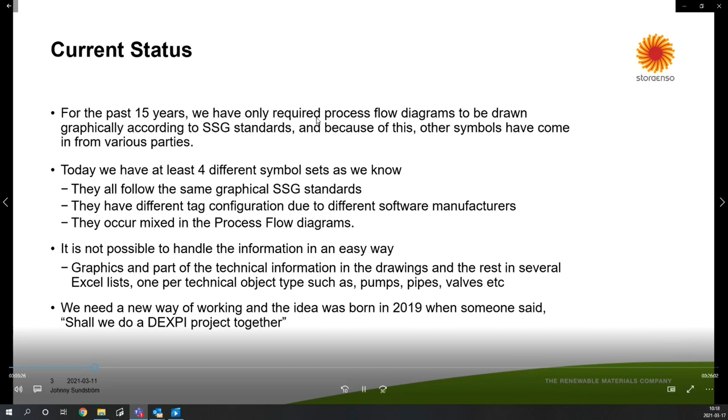Current status. For the past 15 years, we have only required process flow diagrams to be drawn graphically according to SSG standards. And because of that, other symbols have come in from various parties. We have at least 4 different symbol sets today, as we know. They all follow the same graphical SSG standards. They have different tag configurations due to different software manufacturers. And they occur mixed in the existing process flow diagrams. It's not possible to handle the information in an easy way. We have graphics and part of the technical information in the drawing, and the rest in several lists.

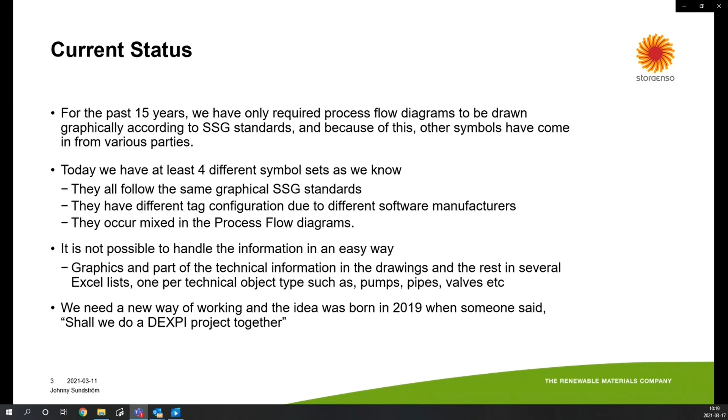Yes, we need a new way of working, and the idea was born in 2019 when someone said, "Shall we do a DEXPI project together?" At Stora Enso, we started thinking about what we need to learn so we can understand what we should do. We understood that most of the software manufacturers in plant engineering already work with established standards and open concepts. We need to learn which standards affect us in the work. We need to learn how DEXPI works.

We need to learn which SSG standards need to be harmonized to be useful. We need to learn how information exchange works. We need to learn what increased interoperability means, because it's a very important step towards digitization of process plants. And last but not least, how should we handle existing flowchart diagrams that contain valuable information?

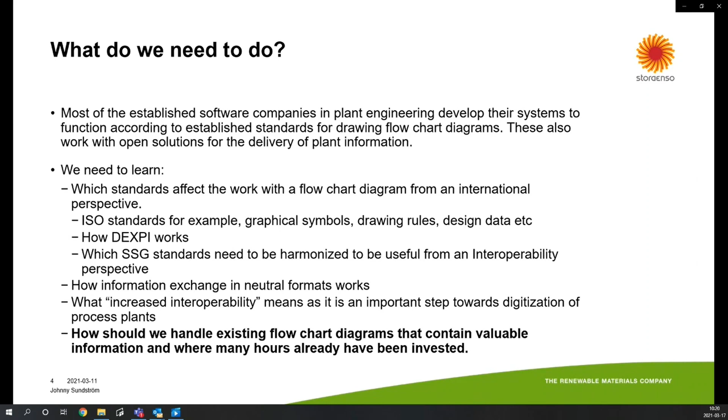Now to the pilot ID and the scenarios. We decided to choose an ongoing project with a suitable scope. We had a breakdown on the partition wall in the existing tank, and the solution was to build another tank including necessary equipment.

And as I mentioned before, the process flow diagrams were designed with EDOC process application for AutoCAD and symbols according to SSG standards. And now we wanted a flowchart diagram based on established standards and concepts, which should be easier to handle by all parties involved in the project.

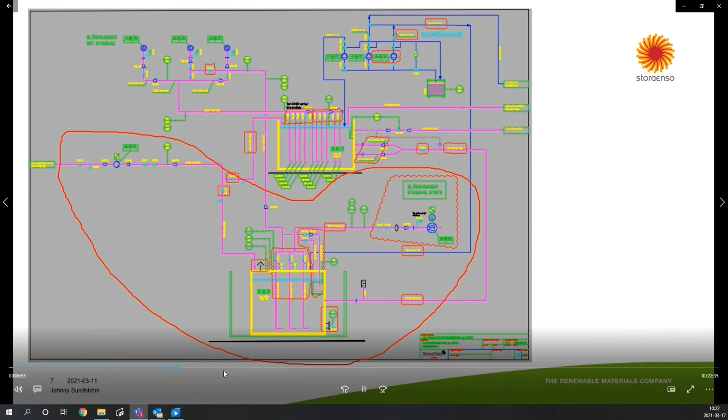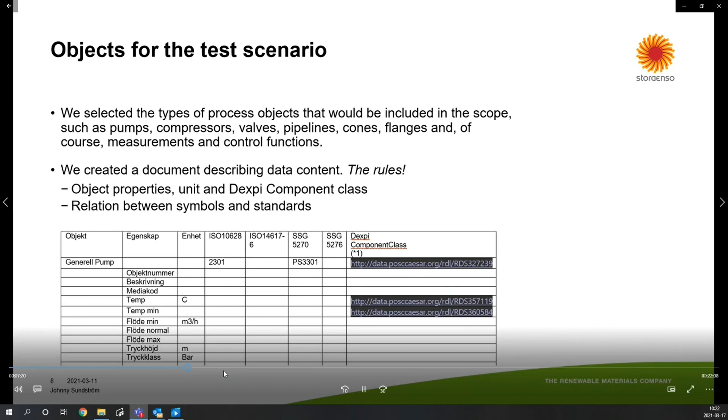We selected the process objects for the tests. We also created a document describing data content, the rules, object properties, units, and DEXPI component classes. And we also included the relation between symbols and standards. We also created 3 test scenarios.

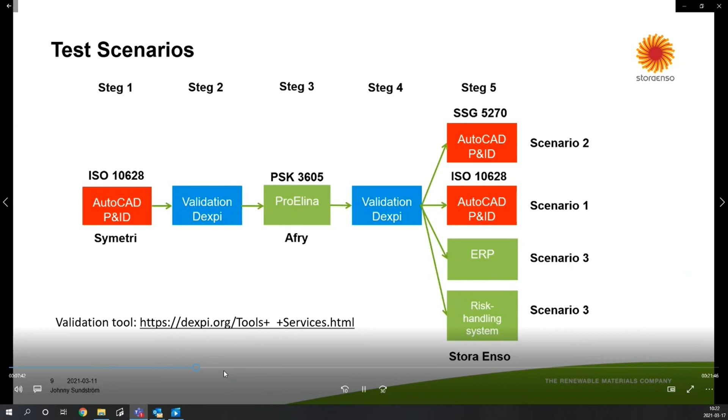And we also realized that the technology makes it possible to draw with one standard and recreate the drawing with another standard if the standards are harmonized.

Hello everyone, my name is Janne Ujärvi and I'm working as an application engineer at Symetri. I will in this section go through a little bit how we interpreted and converted customer requirements according to the DEXPI specification.

As we already heard in the previous section done by Johnny Sundström, we started this pilot work by finding out what customer requirements the plant owner has for the P&ID delivery. In this pilot project, Stora Enso Fors is the plant owner and will be referred to as the customer. In this case, the customer wants to use SSG symbols on the P&IDs.

To be able to swap symbols during the import-export, we investigated the difference between ISO symbols and SSG symbols. In the next step, we started out to match customer data requirements against the DEXPI data model and attributes. We start by taking a quick look at the symbol graphics. We found out pretty quick that the SSG symbols are based on the ISO symbols for the most part, even if the paper and forest industry have lots of unique symbols in addition.

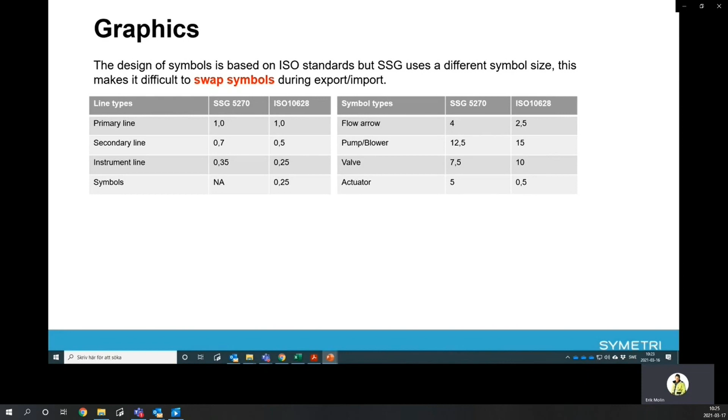The DEXPI specification includes lots of DEXPI data attributes. Some of these DEXPI attributes are easy to match according to the customer requirements. But a lot of the required data attributes need to be handled or transferred as custom attributes. To set up and define custom attributes is a pretty easy task. The challenge is to add them to the right hierarchical level, especially when you have different types of P&ID systems trying to work together.

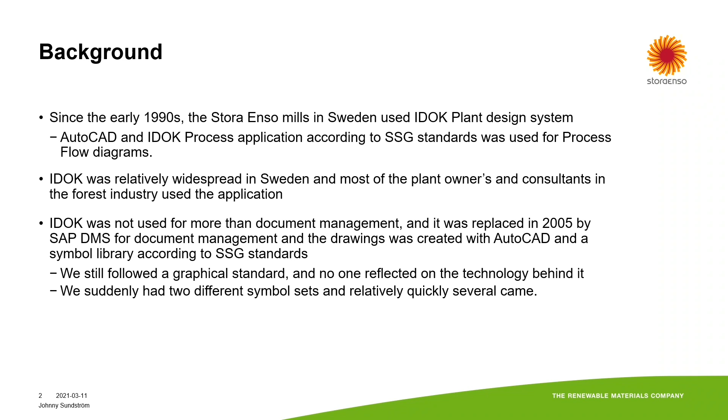What does that mean? We still followed a graphical standard, but no one reflected on the technology behind it. We suddenly had two different symbol sets, and several came quickly, I will say. Current status: for the past 15 years, we have only required process flow diagrams to be drawn graphically according to SSG standards, and because of that, other symbols have come in from various parties. We have at least 4 different symbol sets today, as we know.

They all follow the same graphical SSG standards, but they have different tag configurations due to different software manufacturers, and they occur mixed in the existing process flow diagrams. It's not possible to handle the information in an easy way. We have graphics and part of the technical information in the drawing, and the rest in several lists.

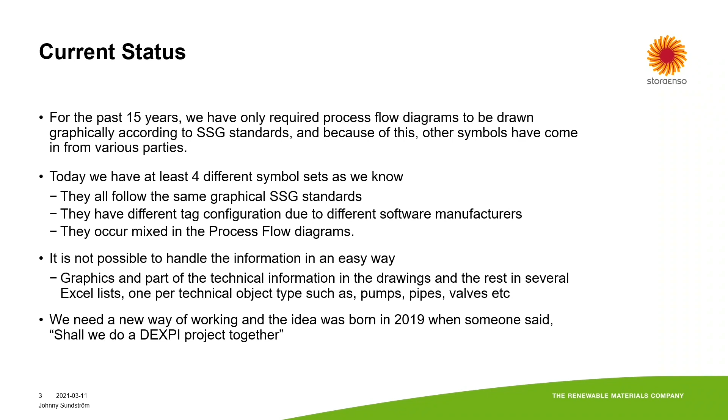Yes, we need a new way of working, and the idea was born in 2019 when someone said, 'Shall we do a DEXPI project together?' At Stora Enso we started thinking about what we need to learn so we can understand what we should do.

We understood that most of the software manufacturers in plant engineering already work with established standards and open concepts. We need to learn which standards affect us in the work. We need to learn how DEXPI works. We need to learn which SSG standards need to be harmonized to be useful. We need to learn how information exchange works. And we need to learn what increased interoperability means.

Because it's a very important step towards digitization of process plants. And last but not least, how should we handle existing flowchart diagrams that contain valuable information?

Now to the pilot ID and the scenarios. We decided to choose an ongoing project with a suitable scope. We had a breakdown on the partition wall in the existing tank, and the solution was to build another tank including necessary equipment.

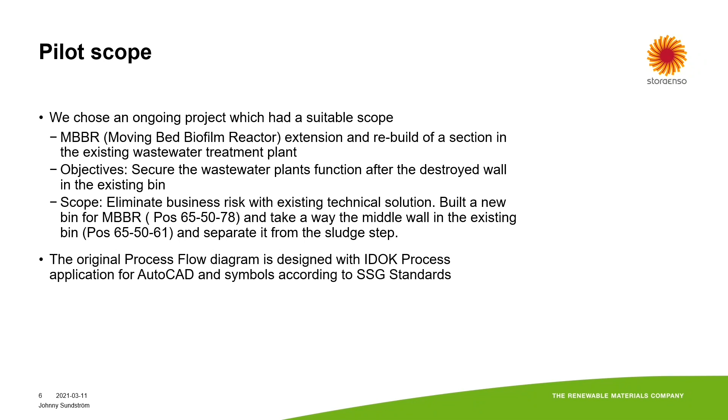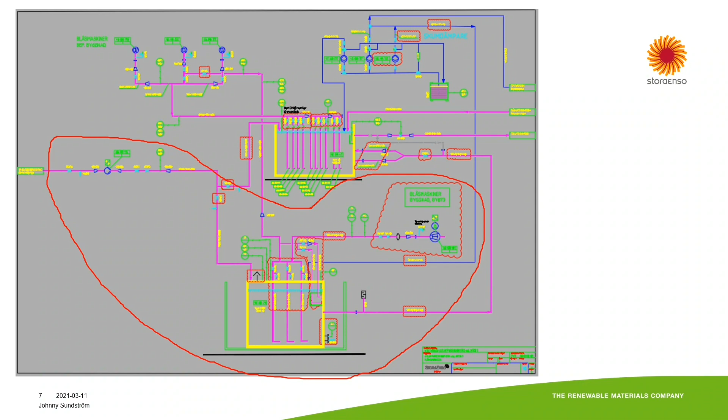Here we have the process flow diagram of the project. We have the existing equipment at the top of the drawing, and here we have the extension. We have the tank, we have a pump and a blow machine, and of course pipes and valves.

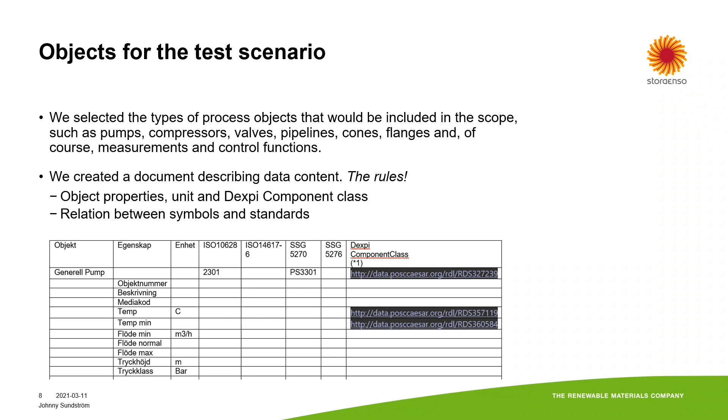We selected the process objects for the tests. We also created a document describing data content, the rules, object properties, units, and DEXPI component classes. We also included the relation between symbols and standards.

We also created 3 test scenarios, and we also realized that the technology makes it possible to draw with one standard and recreate the drawing with another standard if the standards are harmonized.

Hello everyone, my name is Janne Joujärvi and I'm working as an application engineer at Symetri. I will in this section go through a little bit how we interpreted and converted customer requirements according to the DEXPI specification.

As we already heard in the previous section done by Johnny Sundström, we started this pilot work by finding out what customer requirements the plant owner has for the P&ID delivery. In this pilot project, Stora Enso Fors is the plant owner and will be referred to as the customer. In this case, the customer wants to use SSG symbols on the P&IDs. To be able to swap symbols during the import-export, we investigated the difference between ISO symbols and SSG symbols. In the next step, we started to match customer data requirements against the DEXPI data model and attributes.

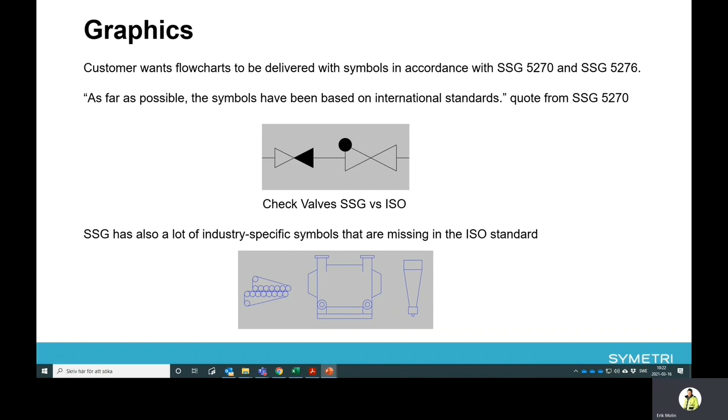One scenario in the pilot was to swap the symbols during the import and export process. Swapping symbols is absolutely doable with the export-import function for the AutoCAD P&ID, as long as the size of the symbols is the same. Unfortunately, SSG and ISO have different sizes for many types of symbols. This size mismatch will cause connection problems between symbols and lines.

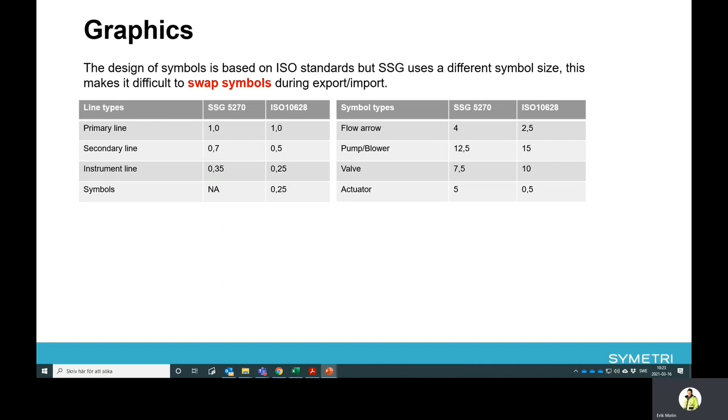The DEXPI specification includes lots of DEXPI data attributes. Some of these are easy to match according to the customer requirements, but a lot of the required data attributes need to be handled or transferred as custom attributes. Setting up and defining custom attributes is a pretty easy task. The challenge is adding them to the right hierarchical level, especially when you have different types of P&ID systems trying to work together.

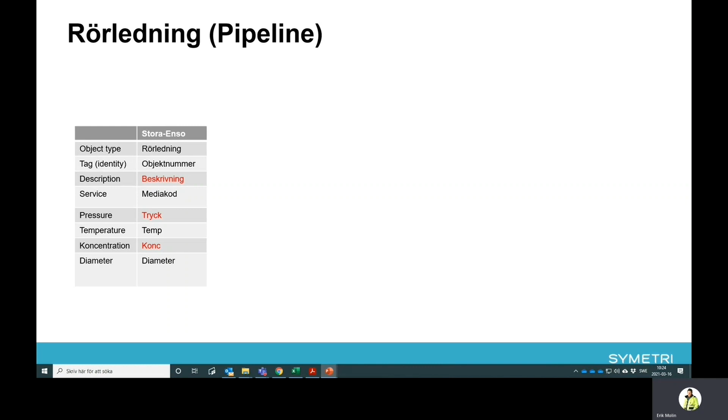In the following examples, I will try to show you some of the challenges with defining custom attributes for a pipeline and other types of objects. We see this short list of customer requirements, just 7 of them. We managed to map 4 of these customer required attributes to the DEXPI attributes. 3 attributes need to be specified as custom attributes.

If we break down the pipeline into the different hierarchy levels in the DEXPI data model, we can see that some of these attributes belong to the piping network system and some belong to the piping network segment. The hierarchy structure suits the P&ID application I work with pretty well, the AutoCAD P&ID from Autodesk. But these custom attributes we want to add could belong to the piping network system as well as the segment. So in this case, we add them to the piping network system level, and then we need to describe this in some kind of framework document for the project.

Because if you don't create a framework document with the right detail level, you could not expect to receive a file with attributes in the correct place, or data attributes at all.

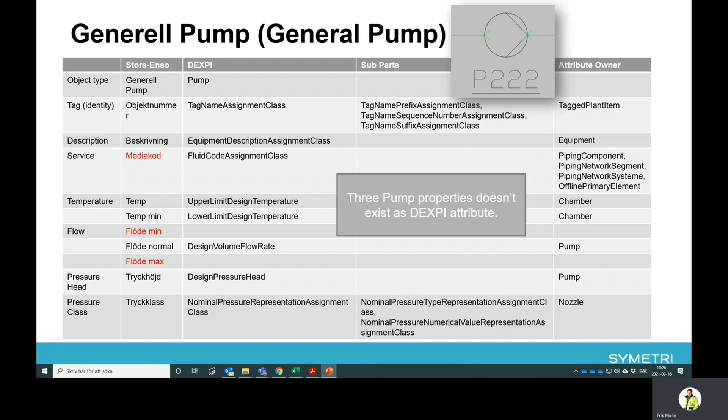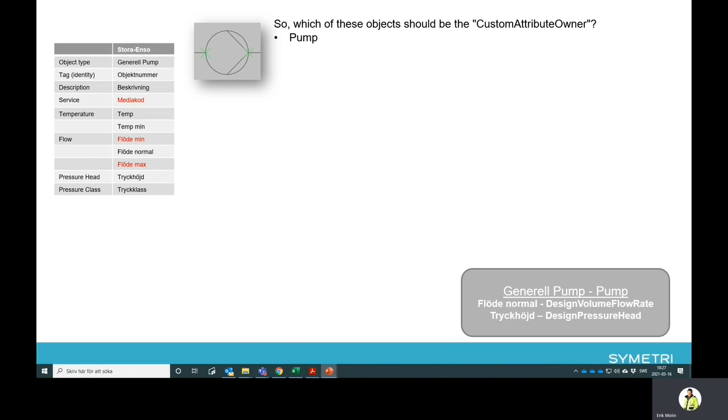So which of these objects should be custom attribute owners? Will it be the pump object, the equipment object, the tagged plant item, or one of the subparts, chamber or nozzle? In this case, it's pretty obvious that the additional flow levels should be added to the pump object. But the service is a little bit more tricky, because DEXPI doesn't specify any service attribute to an equipment object at any level. The flexibility with the custom attributes gives us the opportunity to meet the customer requirements, as long as we add them to the correct level and all parties in the project agree and understand how to handle them.

This work with custom attributes will be the same for every single object type, whether it's equipment, valve, instrumentation, or overlaying hierarchies like the plant structure information.

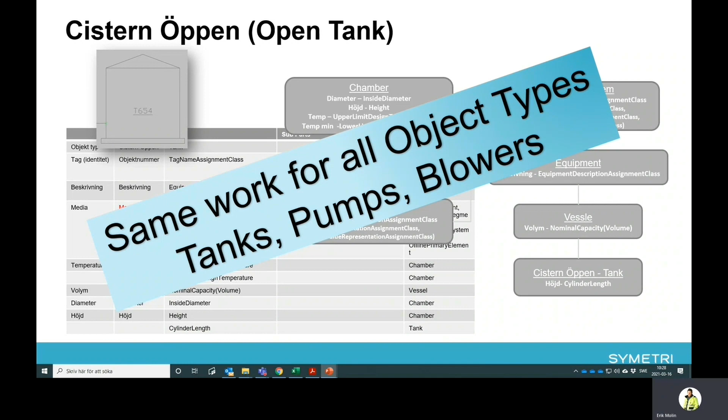Work with the framework document will be the first step in a DEXPI-based project. When you set up this framework, you need to take into consideration what systems will be involved in the project and how you interpret the customer requirements according to the DEXPI structure.

Now we'll take a look at some short recordings from this pilot. In this video, we have finished the work with creating the framework, so now it's time to set up the engineering system.

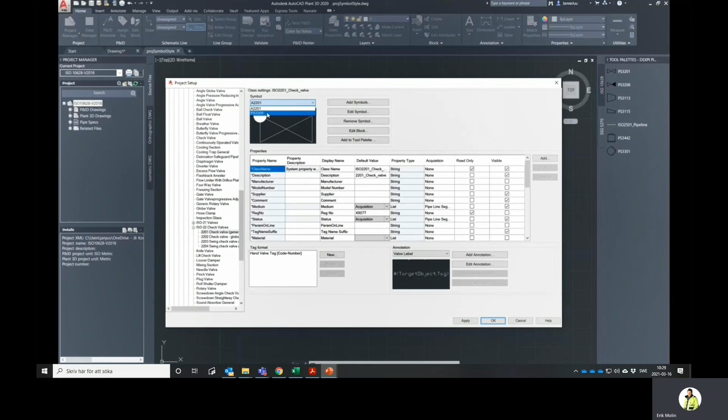In this video, we are exporting one small part of the P&ID to a neutral DEXPI XML file. I will also run it through the verificator before sending it to AFRY for further work on the process design.

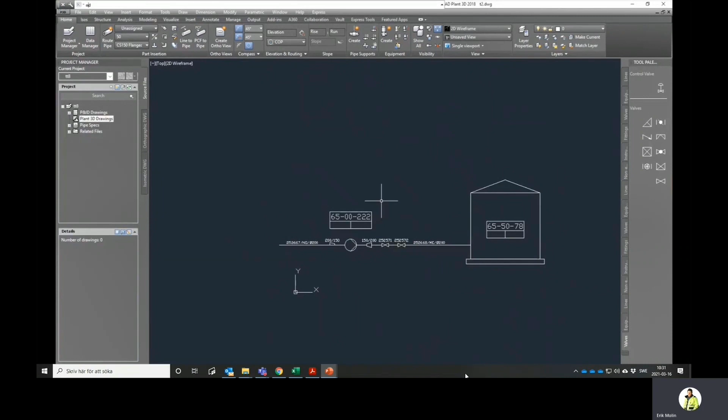In this last video, we will see how it looks like when we receive that DEXPI file from AFRY again. We start by running it through the verificator and then import it into our P&ID system.

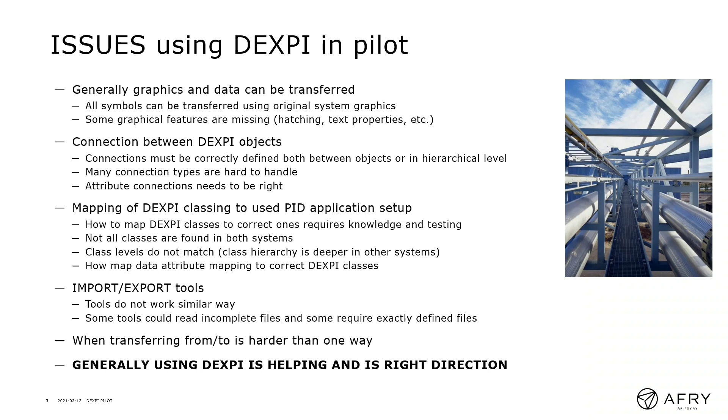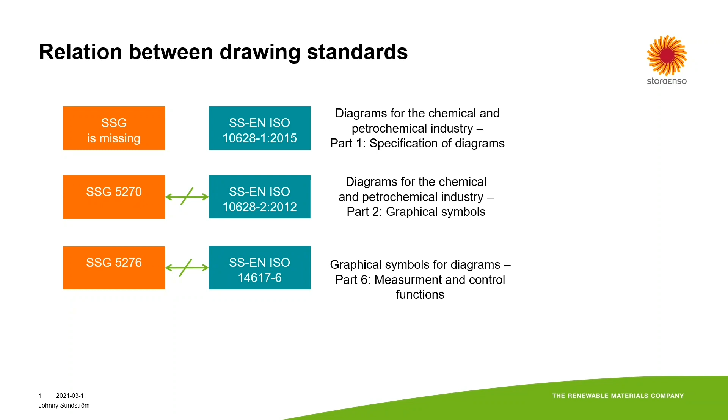We have also considered which established standards affect us and their relationship to the SSG standards. A quick reflection: ISO 10628 Part 1, named Specification of Diagrams, covers the drawing rules that are missing in SSG. And regarding Part 2, the graphical symbols, in general ISO contains many more symbols, but SSG has some industry-specific symbols and solutions.

So what have we found regarding the SSG standards? I think it needs to be clarified what information level the process flow diagrams intend to have if you follow the SSG 5270 standard - is it a flow chart or a P&ID? The SSG standard must also be harmonized with ISO, and it must be available as a complement to the forest industry. We also see a need for a guideline defining the data content of the diagrams, both the data to be represented graphically and the hidden attribute data.

Now some conclusions. We need a framework that describes and meets at least the legal requirements. My suggestion is that the standardization bodies SSG and PSK, together with the non-profit organizations THTH and SEIIA, these four parties should together with the industry develop a framework for the process industry, because the process industry needs an open format for exchanging plant information that can carry more than only the graphical symbols. We need to keep the information quality and have an easier way of handling this information between all involved parties.

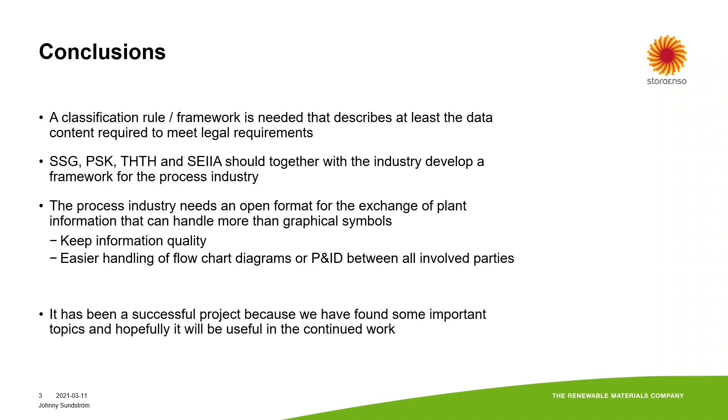So welcome back, and thank you for that. We have some questions. Yes, I love questions, especially when I know them. To get a good question is about knowing the answer. But we can start with the easy one.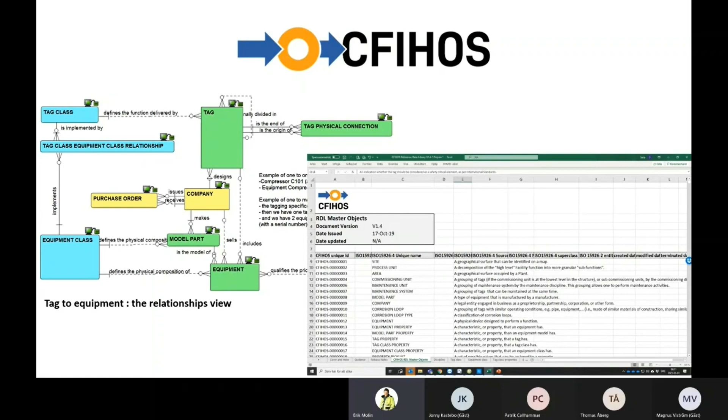But if we go back a little bit, what's happening in Sweden and where are we now? As Johnny told us, we have the Helios project that has been using this type of template, and with success they have been getting data and that's working fine. But it's specially designed for these two systems, Sitebase and the ERP system that SCA has. It's the same if you go to another company, Rottneros, they have almost the same templates. They are based on importing data to IFS systems.

Holmen also uses IFS and other systems, so they have their templates. Stora Enso is another big company in Sweden in the pulp and paper industry, and they have their templates. And we have another company in the north of Sweden, a wastewater treatment plant, Vakin, and they have their templates. And the pity is that these templates are unique. Each company has their unique templates, and that's one of the issues we wanted to look at in this pilot, to see if we could set up an industry template instead of these different company-unique templates.

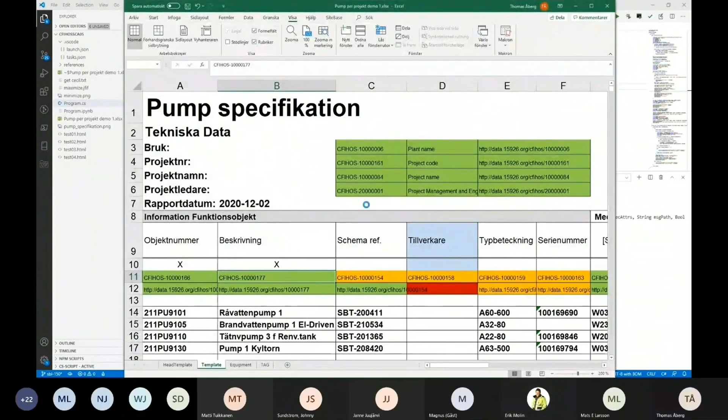And here we can see some output of what it reads, and there are some debug prompts that come to the screen. And if you have good eyes, you can recognize some data from the Excel sheet. We do some test connection and some tests with the SiteBase web API. That is what connects to the SiteBase database. We try to import the 4 rows as pump functions. Actually, 1 row in the Excel sheet is 2 rows in the database, a function and a component.

So it's done and says that we should verify in the SiteBase database to see what has happened or not happened. And as you can see, we have 4 rows with pump functions that come from the Excel sheet. But still remaining is the import of the pump components that are what SEIIA draws in the P&ID schematic. And those also have a suffix of -001.

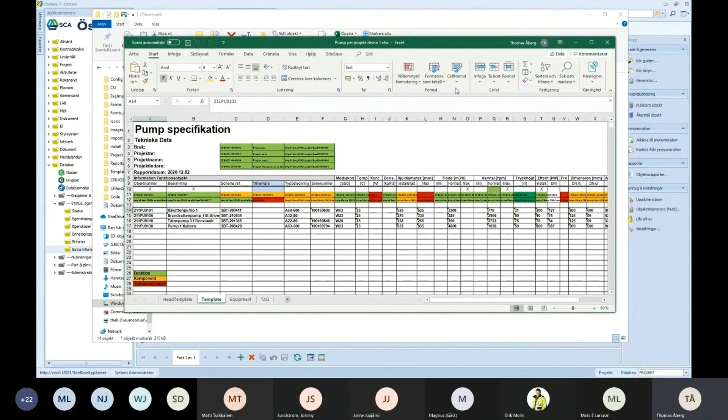We can see that we have the correct tag number 9101. And we have the correct description, råvattenpump 1. Looks to be correct as well. We have some properties, for instance, flow normal or flödenormal in Swedish, and some other properties as well. And since it's a green CFIHOS field, they are put to the function object.

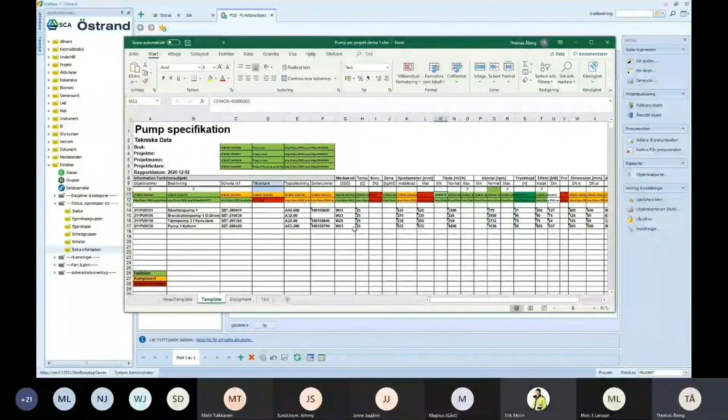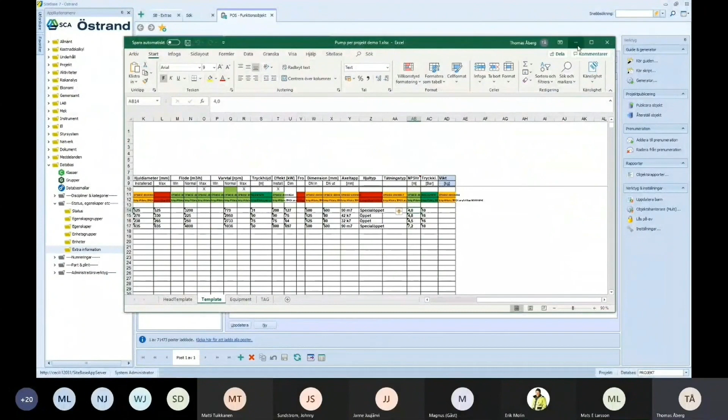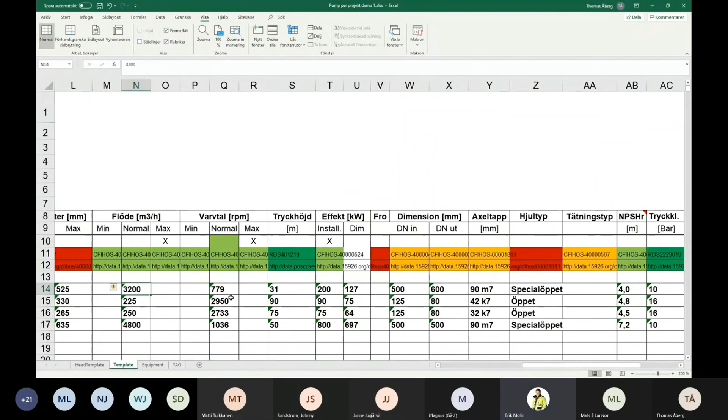We've got a value of 3200. So we verify to see if that's the value in the Excel sheet. We have to zoom in to see that properly. And here we can see we have 3200, so it's made a correct import and update of that property.

The import script is made in C#. It reads the Excel file, sends data to the SiteBase web API that communicates with the SiteBase database, and creates the objects and updates the properties in the database.

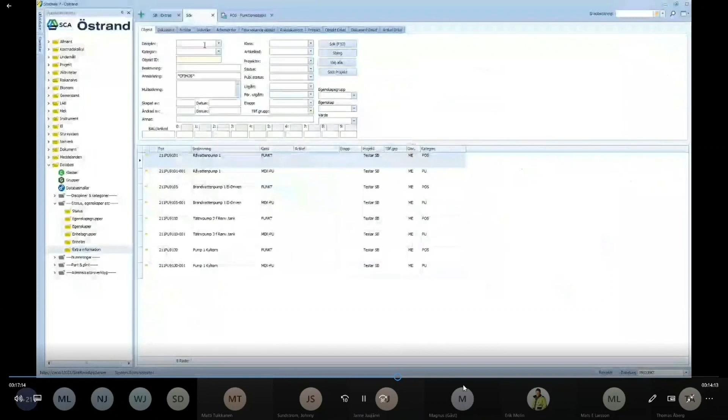And the mapping is mainly done by the user in the SiteBase system in these forms. And as the example, we can see here that the 177 CFIHOS field goes to the description, with the temporary variable between that was called beskrivning, that goes to the SiteBase web API.

And one specific thing here is that in SiteBase the tag number is divided in separate fields. It's not one long string. So we have to divide it up in separate fields, and that is done in this mapping as well. And I guess that's about it in this import.

Okay, thank you, Thomas. And then we're going to continue to look at what SSG have done, and Patrik Callhammar.

Hello, my name is Patrik and I work at SSG with our service SSG product database. Our database is in this structure. We have our items, we have our suppliers, plants, manufacturers connected to this item. And on this item, we have information about part description, GVM, which is our SSG classification tree.

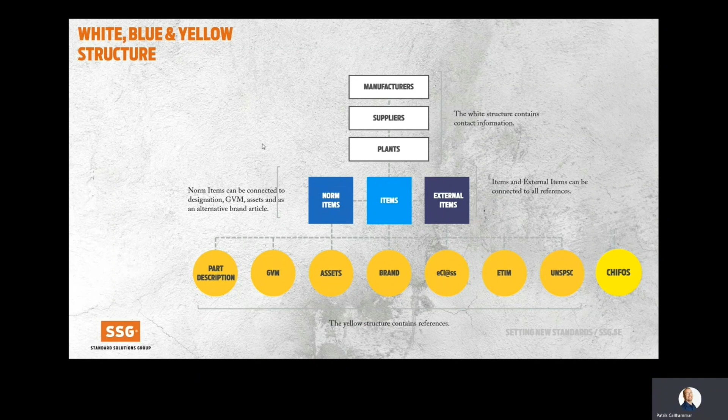So therefore, in this test, we were thinking about getting CFIHOS as a 5th classification tree in the SSG product database. Our structure for the items is we have some sort of identification. In this one, we have our SSG article number, a 7-digit article number which has no logic at all. We have our item designation, which consists of a part description, a brand, and a reference.

And on all the items that have an SSG article number, we also have our own classification, which is called GVM. It is a 10-level top-level classification tree down to the 6th level on each starting row. The norm item we have in our tree, we connect brands, GVM, assets, and so forth.

So on the items, we have our brand logos, we have a primary product image, we have the brand, the GVM classification, the part description, and article numbers, type designators, and so forth. And further on, the SSG classification is the brand, the GVM, and the part description. And also on each item, we can put, for example, eCl@ss.

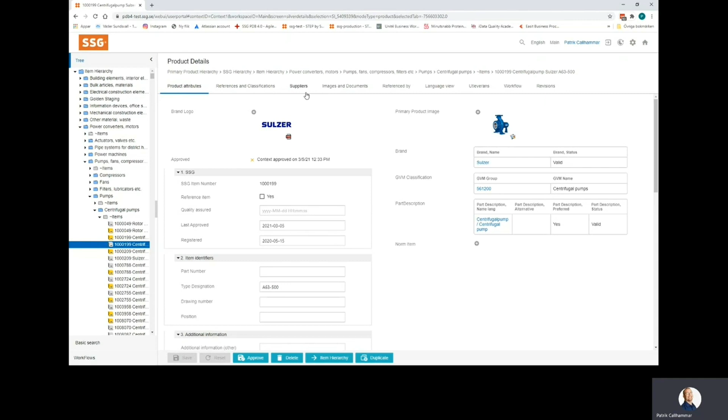And if we look at this pump, this is how it looks in the system. The brand image, the brand, the GVM, the part description, the type designation. And there, if we look at the reference and classification, we have the SSG classification, as I told you before. So if we go to the eCl@ss tree, the centrifugal pump with the shaft sealing, it's empty at the moment.

And if I use the system to import the data, I can do import. I can create a new import and choose which file I want to use.

Use the pump file. Do the next. It finds the columns. I can auto map it, or I can map each column by itself to each attribute I want to map it to. But I have done a preparation, so I do an import.

I use an existing import. I choose which import that I want to use. I have import eCl@ss, which has prepared the columns. I can do next. I choose the file that I want to work from. It finds the columns, and if we look again at the templates, find the exact same columns in here.

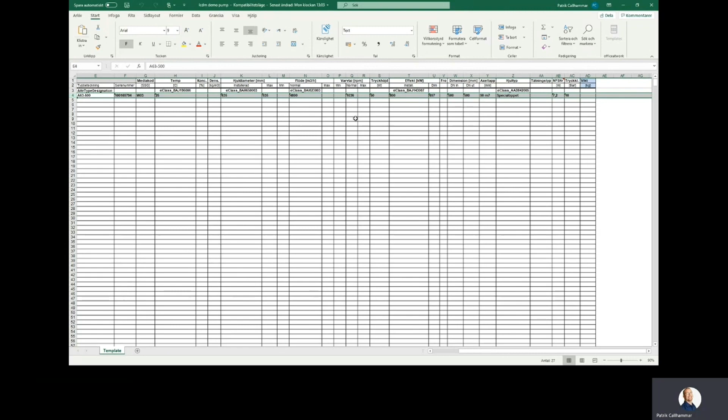We have now seen the pump specification that we have worked with in this pilot, in this SEIIA pilot based on CFIHOS. And when we sent this template to one of the biggest EPCs in Sweden, we got this answer that, in principle, they could have an automatic export of data into this type of templates without so much work for them. So they find it very interesting, the result we have come to in this pilot.

And we also sent them a question about the DEXPI format, and they also said that they have systems that could export to DEXPI. So that's also very interesting to hear from a big EPC in Sweden.

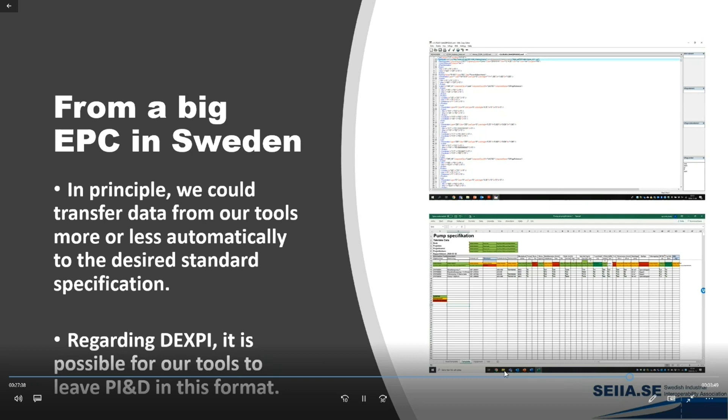So that's why the SEIIA board decided at the board meeting at the end of 2020 that we should, as an organization, set up CFIHOS templates in Sweden for helping Swedish industry to achieve a better interoperability and handover process. And this is a working example of that type of template, now when we have worked with it a little bit more.

So what you see now in the green field is the functional parts of a pump specification. And if you go to the right in this template, you will also find the equipment, the component parts of the pump's equipment specification, and the pump specification, I would say.

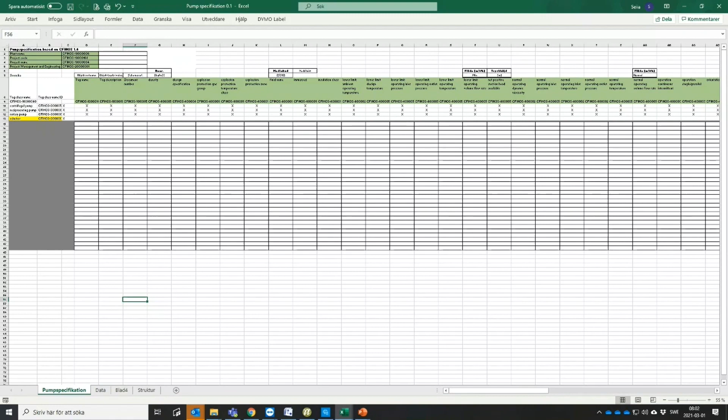Yes, thank you. We believe that using a standard, it will be easier to motivate suppliers to fill in the asset information at the right place in the templates that we have. So we think that the standard would create a better information delivery, which means enhanced quality and less mistypings in the templates. And that would, of course, imply that the interface between the supplier and the customer will be much clearer.

And there will be time savings for both parties. And in all, we believe that this would contribute to a better relation between the supplier and the customer. There will be less errors and in that way a better relationship. This kind of standardization would also make it easier for us to compare different solutions. And for example, we could have quotes made semi-automatic. And we believe that it could be relevant to include this also in the SSG delivery contract.

However, there will probably be some challenges also with CFIHOS in order to implement it. There are several actors that need to accept this standard, and these actors also need to put energy on the implementation. So how big the workload would be to introduce the standard will, of course, determine the success of this implementation also. Of course, there is quite a big workload to go through all the different components and attributes and so on for everything that we have and that is needed when you are installing some new machines.

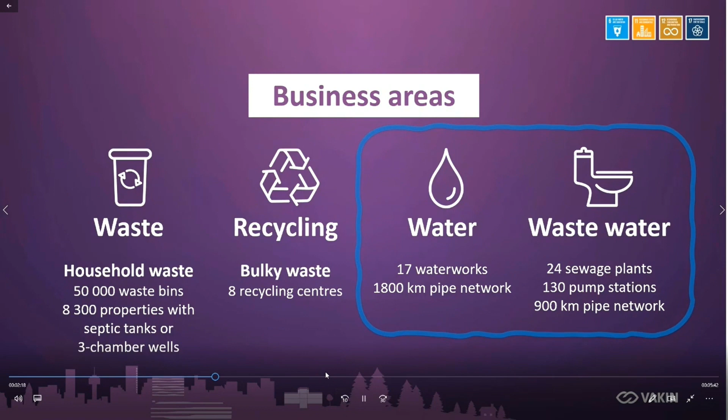The project had a focus on the water sector. As you can see, we have a fair amount of facilities and pipes to look after and maintain. I will now hand over to Niklas, who will take the presentation of the project and the approach. The aim for Vakin in LCDM Phase 2 was to get further knowledge about the CFIHOS method and look into how it can be used to improve data management within our projects.

As a first step, we spent time looking into the method and learning what it is used for and the benefits of it. Then, with this knowledge in mind, we looked into our present situation of dealing with plant data and plant information. Then we chose one specific part of the information chain and made a deeper investigation about the possibilities of using the CFIHOS methodology. And then finally, we spent time talking about the future possibilities of work.

There are two main paths in our present project deliveries: to feed the maintenance system IDUS and to provide our internal customer with information needed for operations and maintenance. The maintenance system IDUS is mainly used to store a selection of technical data for the installed equipment and for administration of preventive and corrective maintenance.

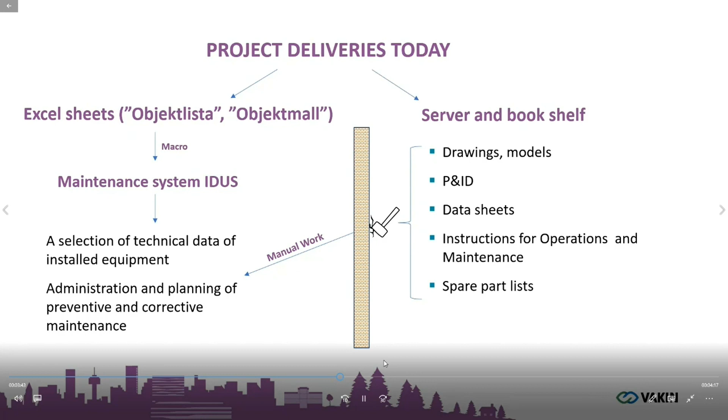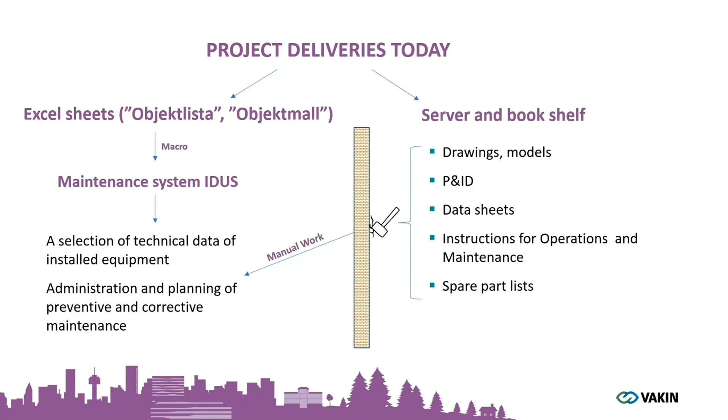The brick wall on the slide should symbolize that we do not have a connection between the plant register in IDUS and the project documentation, such as drawings, data sheets, etc. We also need to put a lot of manual work into moving information from the project documentation to IDUS in order to put maintenance planning in place. In order to feed IDUS, we work with homemade Excel sheets to document equipment and to transfer the data to IDUS.

We have the objektlistan, which is the base that contains all equipment and is mainly set up during the design phase of a project. As the project proceeds, it is filled with more and more detailed information of installed equipment. For a number of defined equipment classes, such as pumps, etc., we collect more detailed and equipment-specific data in the sheet called objektmall. This is also the tool we have used in this LCDM project to investigate a more CFIHOS-based approach in defining the information we ask for.

We also find the method sensitive, as the reading to IDUS is based on column orientation rather than the content. We also have a risk for inconsistent data, as much of the input is based on free text fields. We also find it time-consuming for contractors and consultants to fill in. A lot of manual work is needed to get good quality data and the maintenance planning in place.

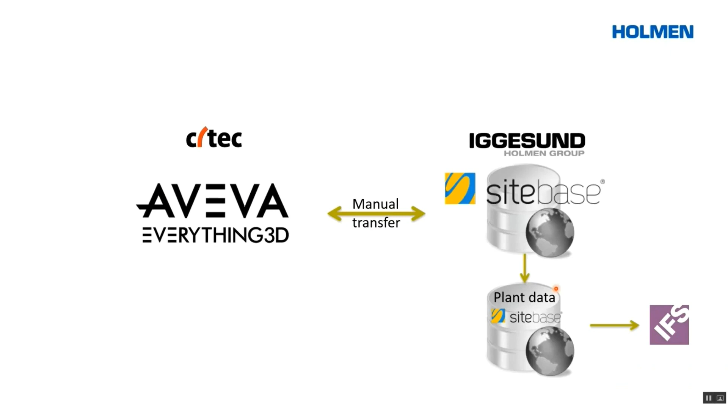From the project database, we go to the plant data database, where they have a digital twin of their plant, and from there the maintenance data is transferred automatically to IFS. We want to remove this manual transfer step, so we want standardized data transfer.

One of the benefits of this is standardized data transfer, where we can see that the data is actually getting into SiteBase. Before, with the manual transfer, a lot of the data wasn't transferred at all, or the documents weren't registered correctly either.

We also want to secure the data flow and status overview during projects for Iggesund, as their projects are done in E3D. And from this we also get standardized isometrics.

We got a few requirements and conditions in order to create this transfer. We need firstly to find out what data to transfer, of course, and which application is master is also very important.

We need to create a workflow and routines for designers so they can work and do this efficiently. And for that we need to agree on attributes and standardize the approach for all suppliers and contractors so they can work in a similar way and the data is getting in and transferred correctly.

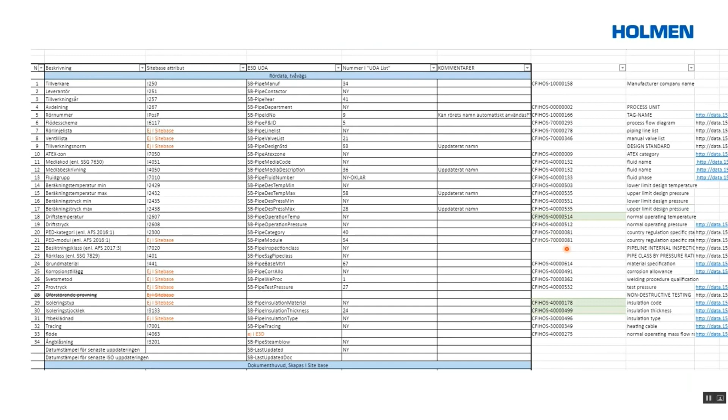For this we created a new solution. We had a link to PDMS, the predecessor of E3D, but a new solution was created for this - an embedded application based on .NET, and we use SiteBase Web API to communicate with the SiteBase database. It's a web service that can access the database with the SiteBase rules.

The application created in E3D sends commands that create calls to the API, and the API returns answers accordingly to the call, with a definition and a format set.

The definition looks a little bit like this. We start with a data type for SiteBase, and then we match this to the property with a read link, and then we can also have a write link. The read link reads the information from SiteBase, and we can write back to E3D with the write link.

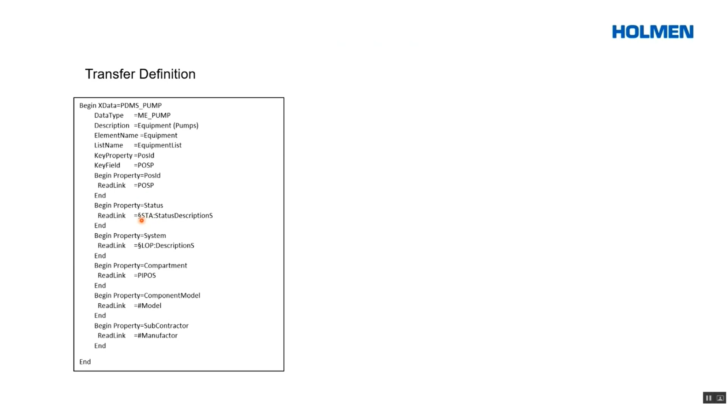This could, of course, also get information from a future RDL. It's not something we have looked into much, but there are a few things we need to create this connection. Theoretically we could also get information about what type of object it is, and then the RDL can tell us what information is needed and get that from Sitebase.

Other goals we have for this are to standardize project deliveries for future projects for Holmen Iggesund, so that all suppliers and consultants follow the same procedure and requirements and deliver data in a way we can use. We get a data transfer in a controlled way and a better view of status without direct access to the 3D model.

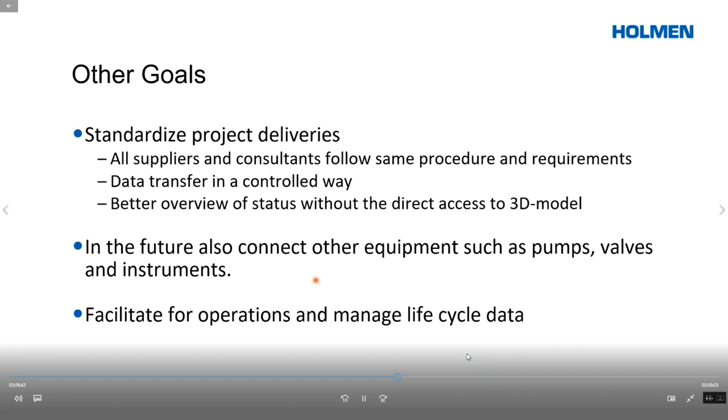In the future we also want to connect equipment such as pumps, valves and instruments. We're concentrating on pipes right now, and this will also facilitate operations and manage lifecycle data for Iggesund. Now I'm going to show you how the link works in E3D.

We have a menu, as you can see here, with all the commands. We can start with a single object. We have one pipe, we want to connect it. We'll go to select, and then it starts looking for the pipe based on its name and trying to match it to an object in Sitebase.

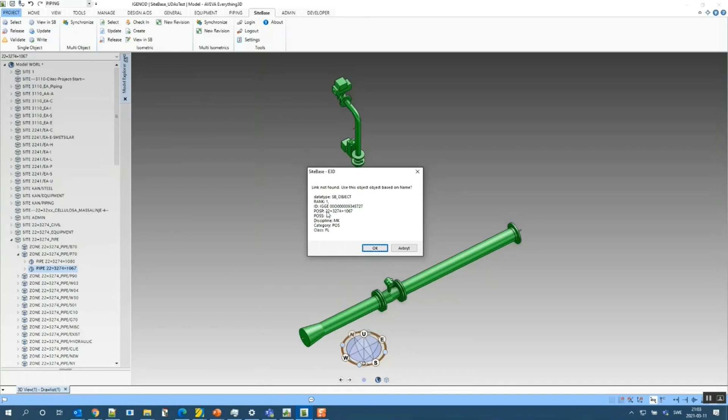When it's finished, it will tell you if the link is not found. The object based on name was found. Finally, we can choose to connect it. Then the element is linked - the pipe is linked to a pipe in Sitebase.

What we can do then is choose to update the pipe. In this case, we are updating E3D from Sitebase. You can see it marked as well wherever there is a difference between the attributes.

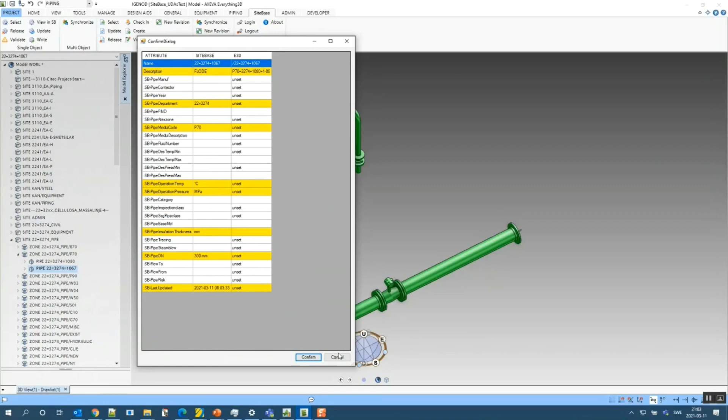Or the other way around is to write from E3D to Sitebase. We can also validate if the element is linked or not. Releasing it will release the connection. View in Sitebase will take us to Sitebase Go, our product, where we can see the pipe online in a web viewer.

There's also the possibility to synchronize, and synchronize is a little more powerful because it lets you choose which side to go from - from Sitebase to E3D or E3D to Sitebase. So depending on your mark, what you want to link, it will transfer the information there.

The data tool that we have will tell us if the attribute is readable on the other side. So if it's grayed out, then we only have a write link, or we only have a read link.

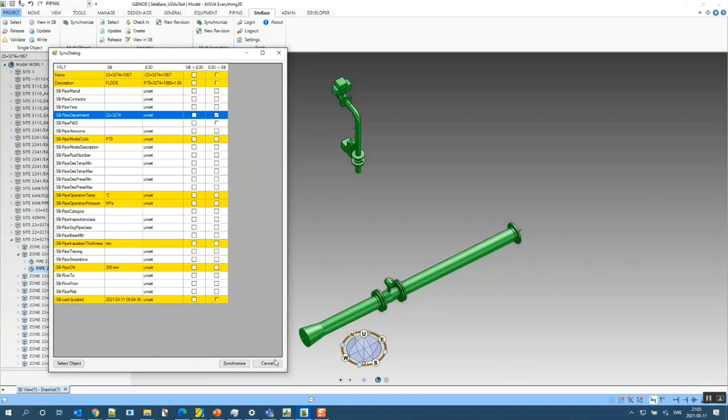So you can go here and either match objects, as I did before with one pipe, or select a pipe here. If I click on that, it will open a menu. When it's ready...

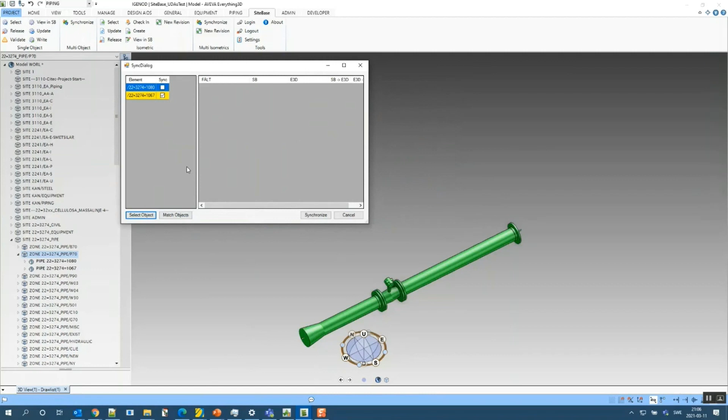As you can see, we have a search option, so we can go and search for the pipe. You can see we have three different options here. You can choose one that fits, and the element will then be connected.

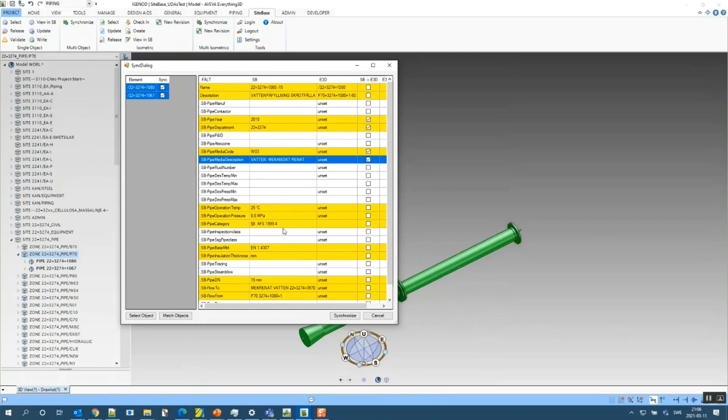And now we can synchronize both of them, if we choose to, or only one of them. If I have both of them and add a few values to synchronize, we mark both, click on synchronize, and two elements are updated.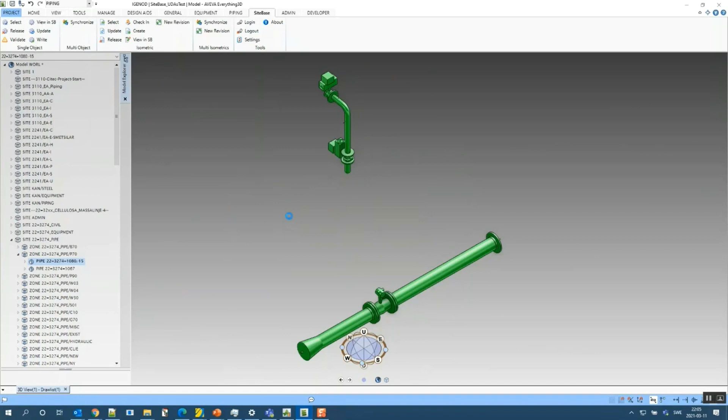Now for the isometrics, we have a similar way of working, where we can go and select one, and we can search as before, or we can also create one. In this case, it sends a command to the API to create a new document post in Sitebase under the pipe. Like this, and the document is created.

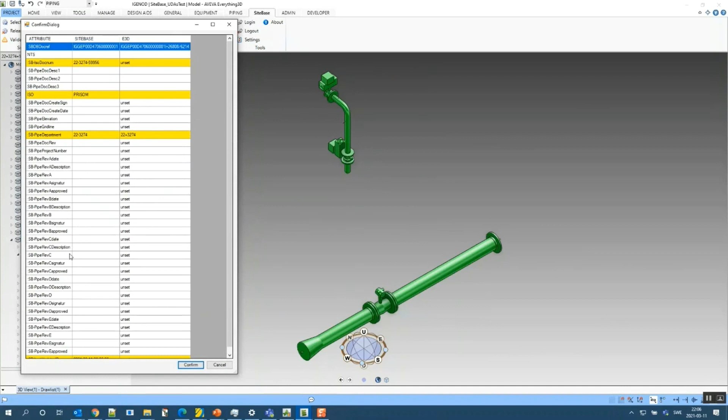Then we can go and update, so we can update the document information. There's a different set of attributes for this. We also have the possibility to synchronize several documents, same as before.

We can match them or select them from here. We can also go and alter the revision for one document, or if we are on a zone, we can do the same for several documents. Then when we create a document, we create the isometric when all the data is updated.

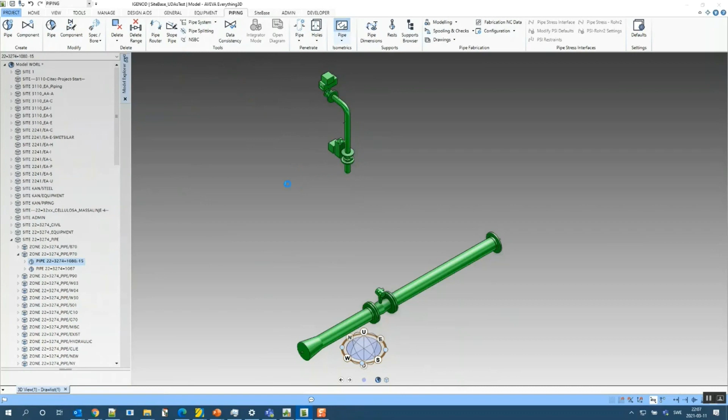Create one as always, PDF file. We can go and check in the file, and it sends it to Sitebase. That's all from me.

Yes, thanks for that. And let's hear if we can connect Amaya and Peter. Can you hear us? Yes, I'm here. Hello. Hans. Hello. Good presentation. What is your opinion? Considering this project is a pilot, what potential do you see in terms of time reduction if you implement this in a full project? What can you see in the future? What can we use it for?